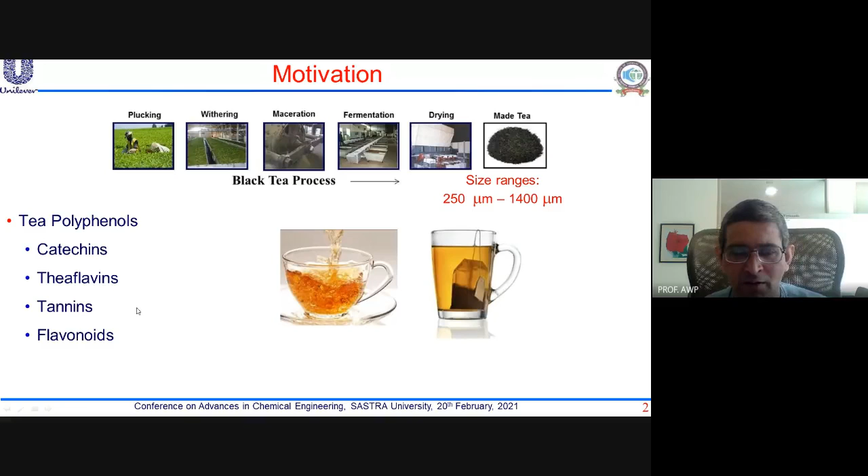These are just some of the components that we drink. These are not all the components - obviously there are many more. They are just written in terms of classes of compounds.

Remember, when you drink tea or coffee, you are drinking all these chemicals, and you're gulping down all these polyaromatic compounds. Just to give you a flavor of this...

If you take, let's say, 2 grams of tea and put it in water - somebody was mentioning refluxed - yes, if you put it in water and reflux it for 1 hour (normally we don't boil tea for 1 hour, but if you do this), 2 grams tea gives you a total soluble solids of 40%. That means out of this 2 grams, the insoluble part is 1.2 grams and the soluble part is 0.8 grams.

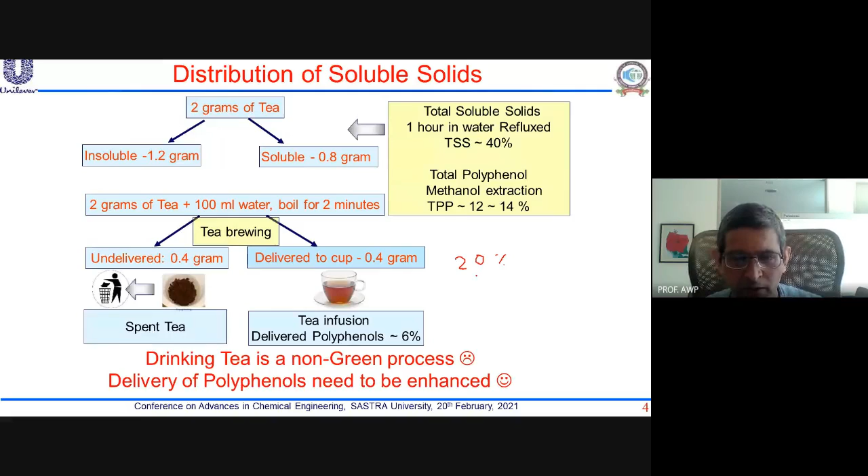If I approach this problem from an engineering point of view, think of it as a chemical reaction where I get a yield of 20%. How do I improve the yield of a chemical reaction from 20% to some higher number? Even if it is 25%, it's acceptable—that's a 5% increase, but a 25% increase over the existing yield. So that itself is a good target.

So the engineering concepts I need involve first thinking about the fundamental steps involved in this process. Unless I understand all the fundamental steps, I can't make a model and predict the infusion profile. And if we can't make a model and predict, we cannot improve.

So that is the engineering philosophy we try to learn in our career—that as engineers, we don't do trial and error. We try to investigate from a fundamental point of view, make a mathematical model, and try to predict.

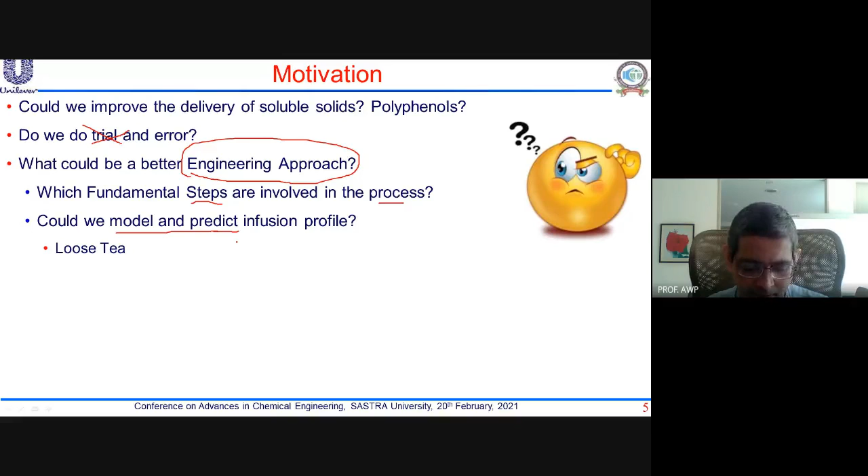Once we do this prediction, we need to look at two aspects. One is loose tea, which all of us drink, but the whole Western world does not use loose tea—they use tea bags. So a lot of the world's tea consumption is in the form of tea bags, whereas in our subcontinent—India, Sri Lanka, and similar places—it is loose tea that we drink or infuse.

So we need to not only understand these steps, we need to make a model and predict for both kinds—loose tea and tea bags. That's what I'm going to talk about today: how we go from these fundamental steps, how we make a model, and how we apply that model to both loose tea and tea bags. I'll go a little fast through some of these slides.

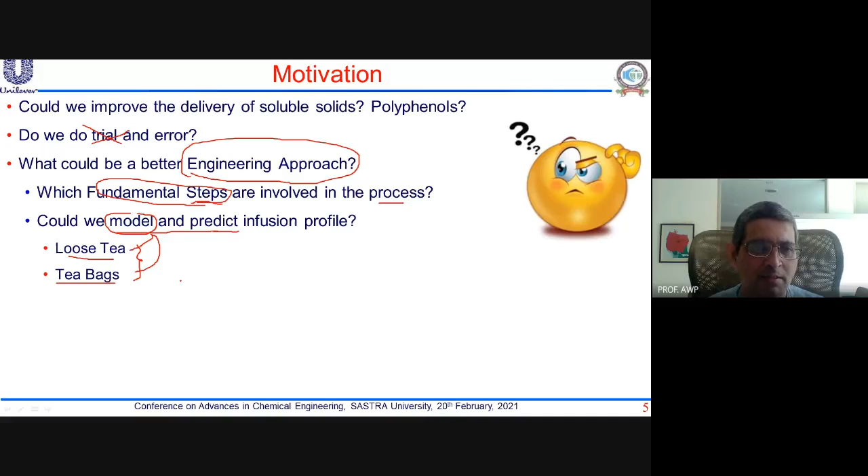So first, what are the fundamental steps? Now I have a tea bag or loose tea. Some of you have already mentioned in the chat box that there is a mass transfer process. Yes, there is mass transfer of components coming from the tea granule—it comes out. But before that can happen, water has to go in first.

So the first process is water going inside the tea leaf, causing swelling or infusion of water into the tea leaf. Once water is inside the tea leaf, the soluble components from that tea leaf dissolve in the water. Now that water, containing dissolved materials like polyphenols, catechins and so on, has a concentration gradient, and they come out—so there are two mass transfer processes.

One is the internal mass transfer through the leaf, and one is the external mass transfer from the leaf or particle or granule into your cup. If you think about a tea bag, there is an additional resistance because of that tea bag paper. Water has to diffuse through that paper. There is a diffusional resistance for water to go inside, as well as a diffusional resistance for the infusion to come out from inside the tea bag to outside in your cup. So when you take a tea bag, there are two more resistances arising out of the tea bag paper, and we'll talk about that as we go along.

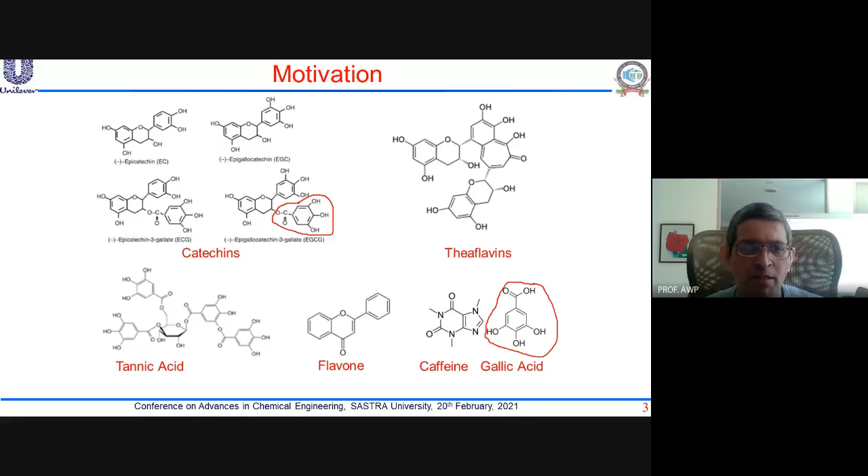Obviously, UV-visible is not a quantitative measurement. You need to have a standard and a calibration curve. We can make a calibration curve because the underlying component, if you see all these compounds, is this gallic acid. So we can have a calibration curve with gallic acid. Gallic acid you can get pure from Sigma Aldrich and other companies, and then make a calibration curve with gallic acid. When you put all these things in UV, you can say that my infusion has so many equivalents of gallic acid, because that is what we are using for our calibration curve.

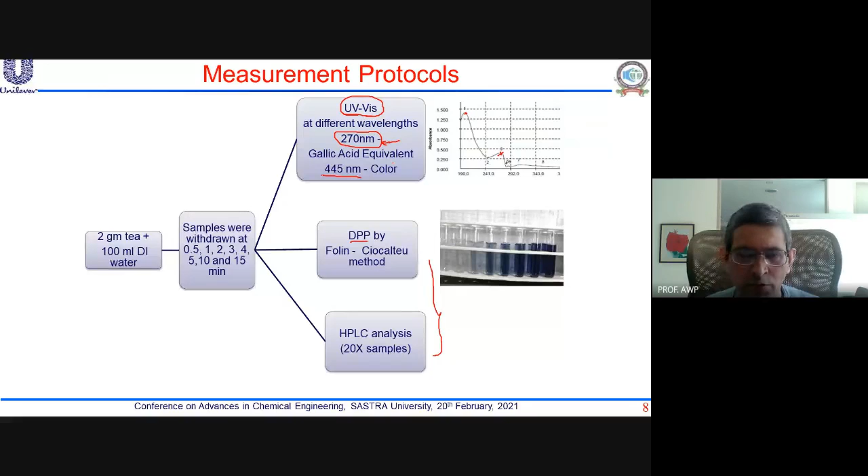So results, when we write, we are writing in terms of gallic acid equivalent that is present in the solution, in the cup. Okay, so just a little bit, two slides about modeling.

One is, you are very well aware that there are different scales of modeling. You could make a model at a reactor level, at a particle level, at a pore level, or at a molecular level. The scale of the model is reducing as you go from left to right. Obviously, the complexity of the model increases from left to right, but the depth of information that you get increases significantly as you go from left to right. And of course, the time and cost of model solution also goes up as you go from left to right.

So if you have had a process modeling course, these are some of the things that you deal with. Obviously, you would realize that if you are modeling at the scale of equipment or the reactor, then you end up with algebraic equations, which may or may not be time dependent. If you are trying to model at a particle level or a pore level, you end up with ordinary differential equations, either in space or in time, or both.

And if it is both, you end up into partial differential equations. So this is the sort of hierarchy of models, and we need to think about what level of model we want, so that we can have a good balance between the information we want and the cost of doing that model. Cost in terms of time, in terms of computational facilities required, and so on. Time and cost are one and the same.

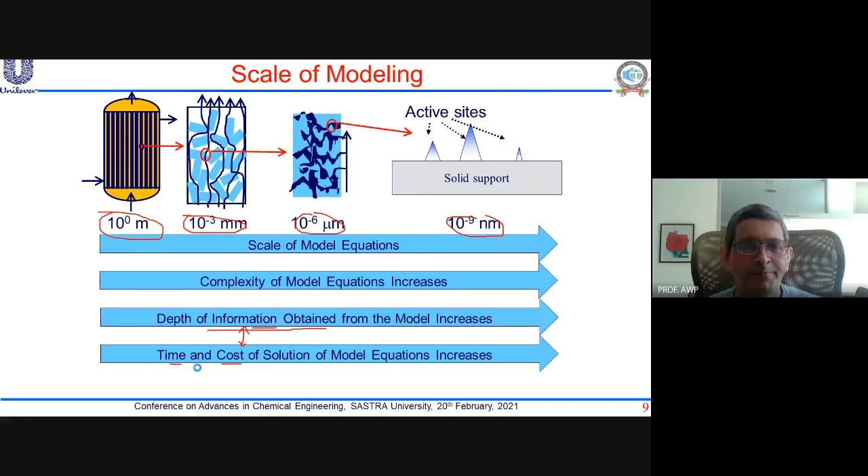So this is a judicious choice that we have to make when we need to make a model. I hope you have studied some of these concepts in your process simulation course.

So let's talk about infusion, infusion of loose particles. As I said, we need to understand all these steps, and the first step is looking at swelling, water going inside of the leaf. That's the first step we need to quantify. Once the swelling happens, then infusion profiles, and then comes our mathematical modeling.

So I will go a little faster now that you are aware of all the things you want to take into consideration in developing the model.

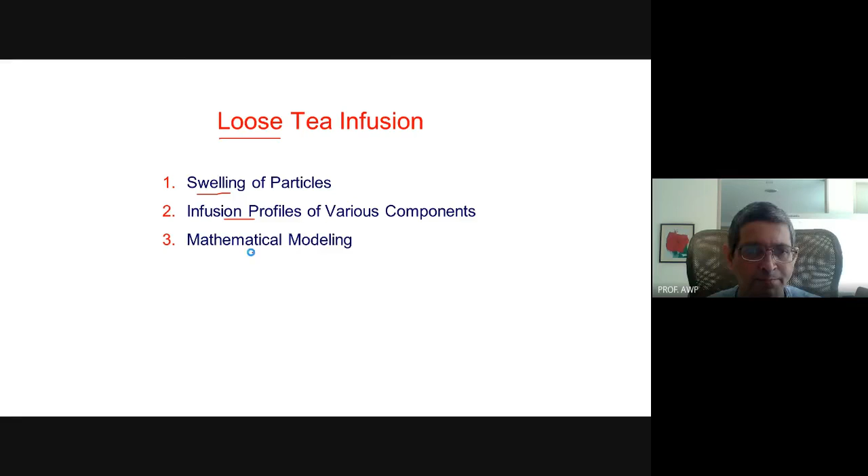First of all, we need to think about the size distribution. Whenever you buy tea, it is not going to be one particle size, you will get a size distribution. That's something you need to measure. If you have to do controlled experiments, you need to take a very narrow size particle distribution, so you sieve and take smaller fractions for your experiments. Otherwise, if you take the whole tea, you have a whole bunch of particle sizes, and you don't know what is happening to which particles. So that's what we do.

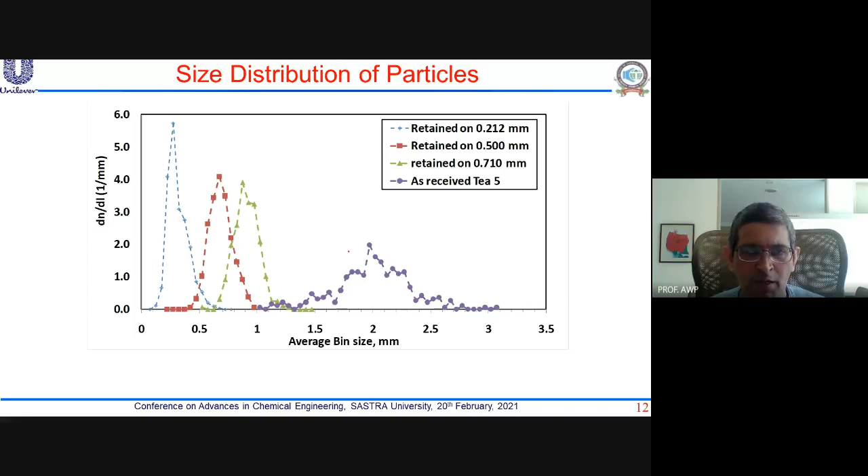And if you have to investigate swelling, there are a couple of ways. We investigated a single particle, and with the help of a camera, we tried to look at the increase in diameter or surface area with respect to time, how this particle becomes bigger because of swelling. Or you can take a bunch of particles and do an infusion, and find out the extent of swelling by seeing the height of the bed before you start infusion and the height after, then you can quantify the increase in volume and characterize the extent of swelling.

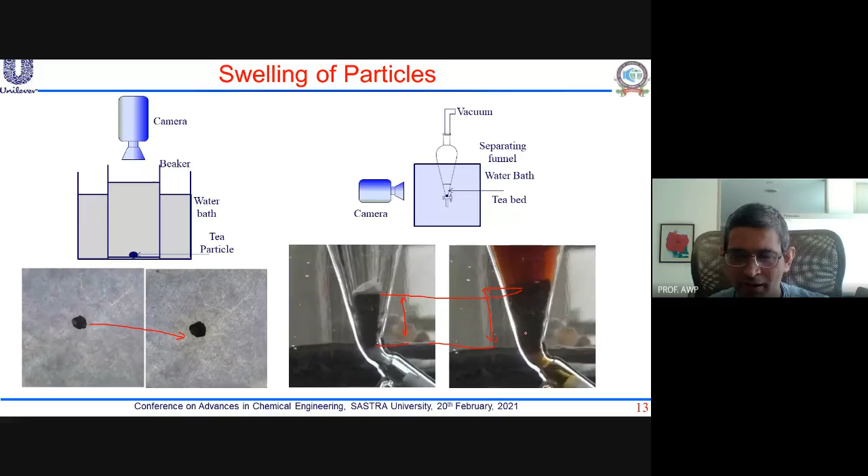You can take a different diameter and so on. Don't worry too much about the results. There are a couple of things which I would like you to conclude from these graphs.

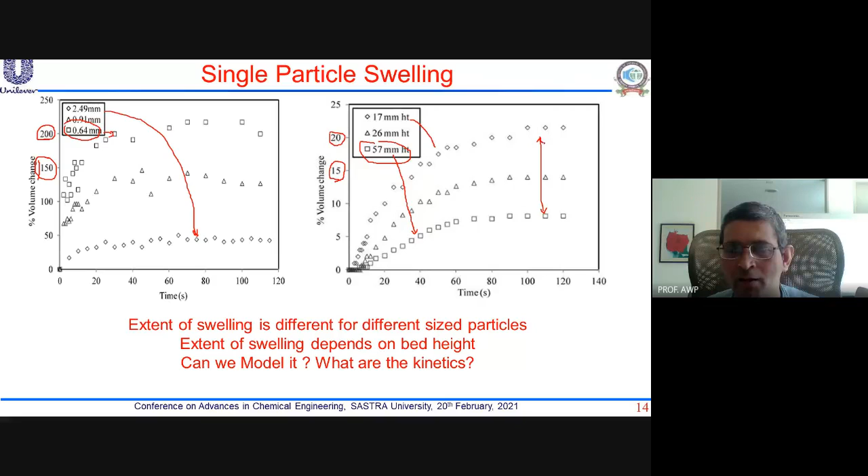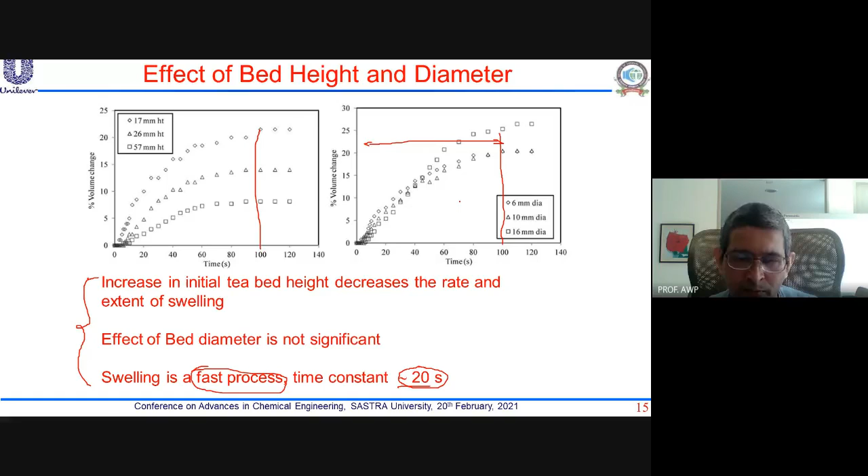Now we have seen so many things, that different particles swell to different extents. Now how do I understand all these processes, and how do I quantify this a little bit better? One of the ways that chemical engineers understand different parameters or effect of different parameters, very peculiar to engineers, is we try to make things dimensionless.

So we can define a dimensionless swelling parameter as the diameter of the particle at any time t minus the initial diameter, divided by the diameter at infinite time minus the initial diameter. So now this dimensionless swelling parameter is going to go from 0 to 1.

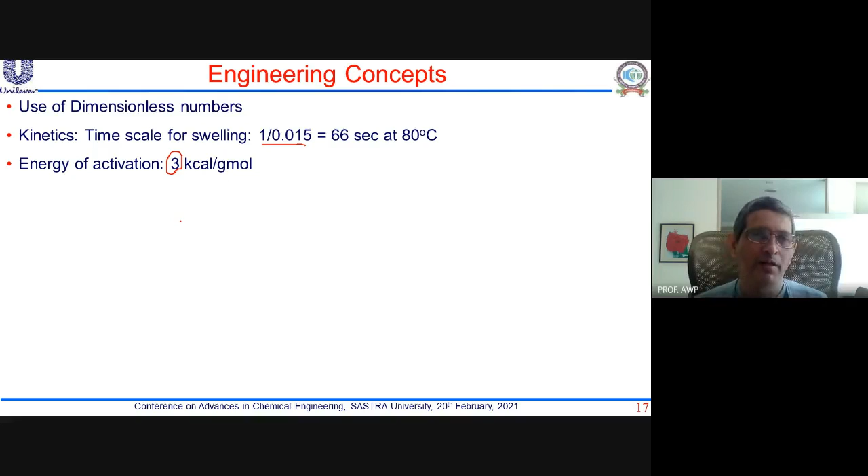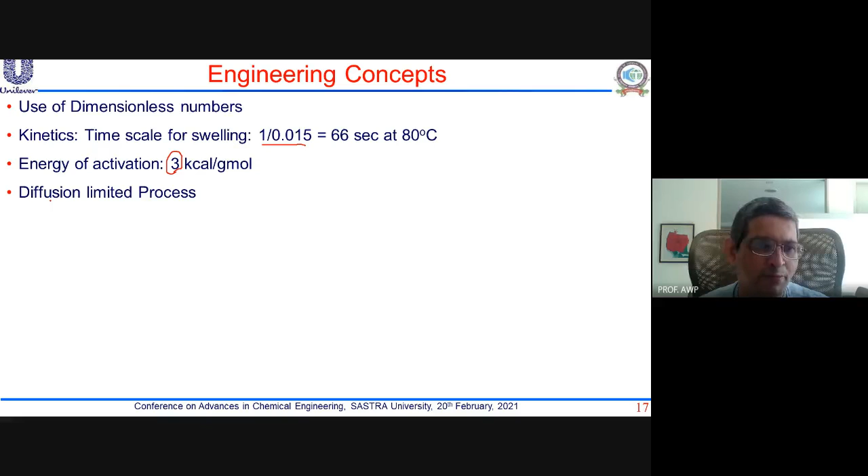This number should also tell you something, that this swelling process is controlled by diffusion. It's not like a chemical reaction, it is more of a diffusion of water through the leaf, and that's why the energy of activation is so very low. That means this water infusion is a diffusion-limited process.

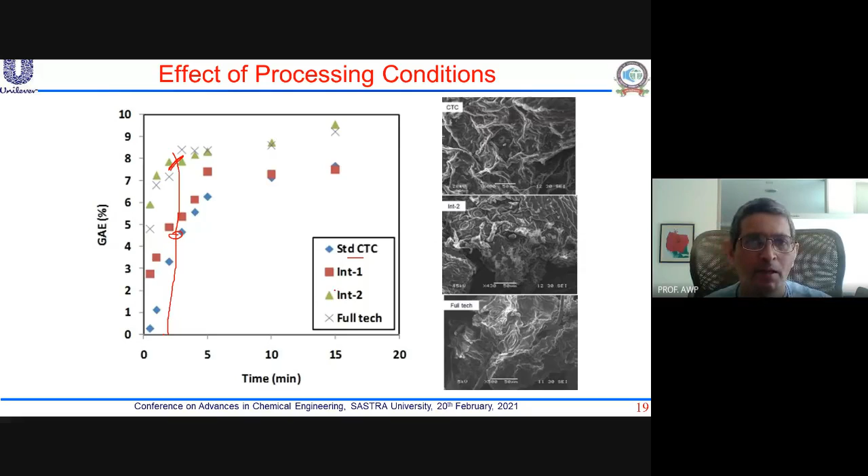So if you have to understand kinetics, this looks like a first order process, right? But you see, it's not quite like the first order process, there are two time scales here. There is one time scale that is like this dynamics, and there is another slower dynamics here.

If you have to fit a first order kinetics model, it doesn't fit really well. If you just plot log of concentration at infinite time divided by concentration at infinite time minus concentration at any time, versus t, you don't get a good fit here because of this slower time scale.

So what people did just in the 1980s is try to modify it by a constant, by an intercept. So what you're really measuring is the dynamics of this slower step, and the intercept is what you are really inferring by this constant A.

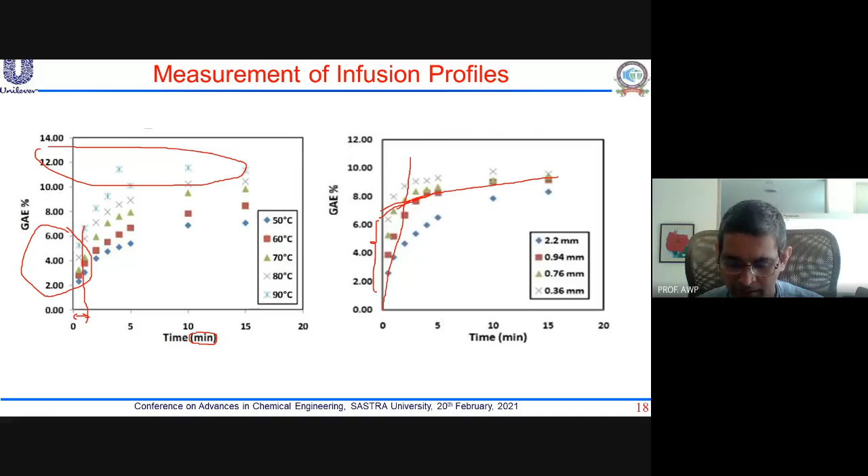So does this tell us the physics of the problem? No, it does not. Does it help to quantify it a little bit better? Yes, it does. And then I can use this K observed and look at the effect of temperature, and then I can find out the energy of activation.

So again, this is also a partly diffusion-limited process. We are able to understand a little bit more by going to this sort of semi-empirical kind of model. That's what people did in the 1980s.

Now, obviously, we need to go one level more because we are in the 2020s. So if you have to think in terms of two aspects, one is diffusion and one is the dissolution of the active components into this water. There are two processes, and we as chemical engineers are the most endowed people to handle diffusion and chemical reaction. We do it all the time, all our life, diffusion and reaction simultaneously or in series or multiple reactions and so on.

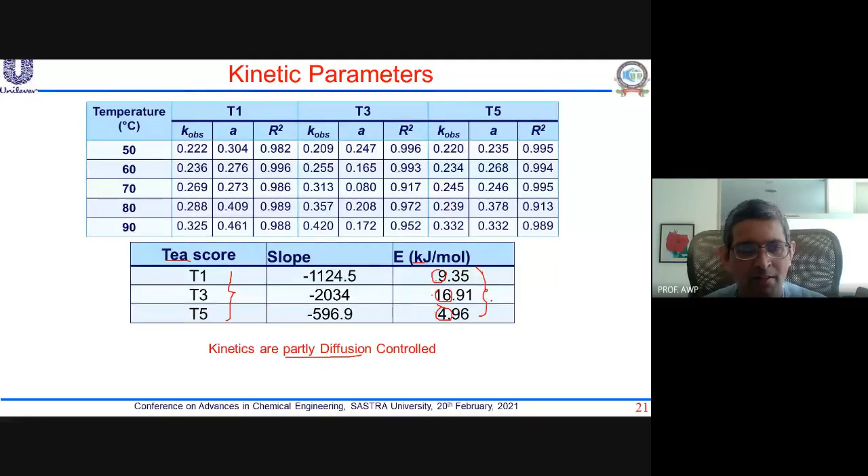Based on this, you can also work out the effective diffusivity of this process, and you can see that effective diffusivity is about 2.2 into 10 raised to minus 10. Oops, one cardinal sin I have made - I have not written the units. Let me write the units here: meter square per second.

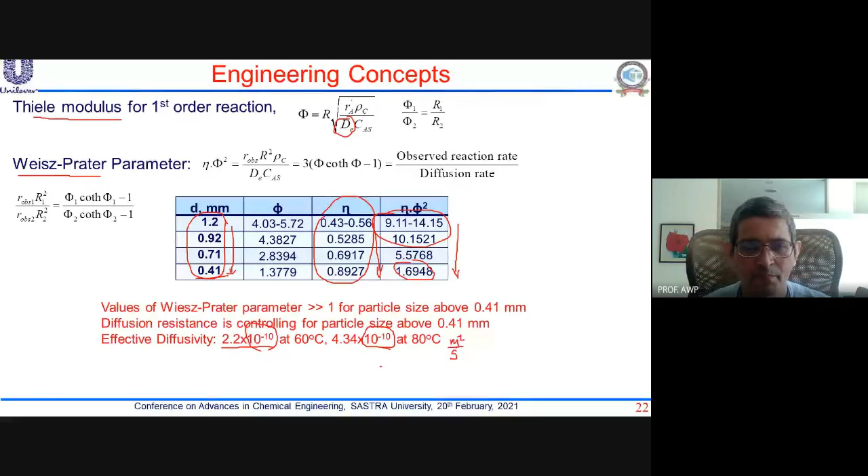So this is like diffusion through solids, membrane processes - these are the kind of diffusivities you get in catalytic processes, diffusion through the pores. Obviously here there are no pores, it is not a porous leaf, it is one leaf. The diffusion is occurring through that leaf matrix, but it's the same order of magnitude of diffusivity.

Here is one graph I would like to emphasize. Let us plot gallic acid equivalent in the teacup versus the volume change - fractional volume change, not percentage. If plotted in terms of percentage, this would just be 20%, 40%, 60%, 80%, and so on. This is the data, all the data from our experiments.

What does this tell us? Look at two extremes - this is one more thing we as engineers do to understand the process: we try to look at limiting cases. One limiting case could be swelling kinetics are far, far faster than infusion kinetics. If that had been the case, our graph would have looked like this red line - all the swelling would have been complete before any infusion starts.

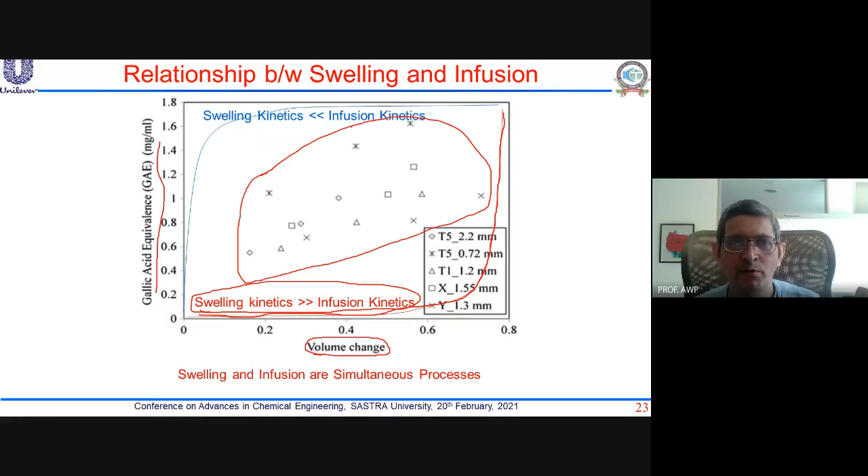If we had the other limiting case, swelling kinetics were so slow as compared to infusion kinetics, all the material would have essentially come out, and then the volume change would have occurred. That's the kind of engineering analysis you need to do - think about what are the limiting cases. Obviously there are two processes happening simultaneously, swelling is happening, infusion is happening. So what is the limiting case? Swelling very, very fast is one limiting case, infusion very, very fast is another limiting case.

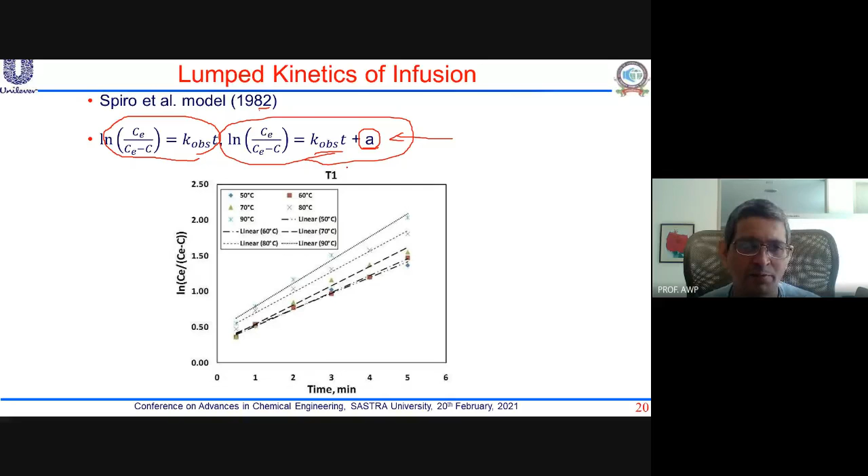You can see all the experimental data shown by these symbols fall in between. That means both swelling and infusion processes are occurring simultaneously - it's not that one is more important than the other. Now you can see how much more insight we have gotten into the process rather than just this empirical or semi-empirical kind of equation. This equation does not tell us anything about all these processes, whereas look at how much more information and understanding we have gotten about the process by doing these experiments, and not just doing experiments, but analyzing the data from an engineering point of view.

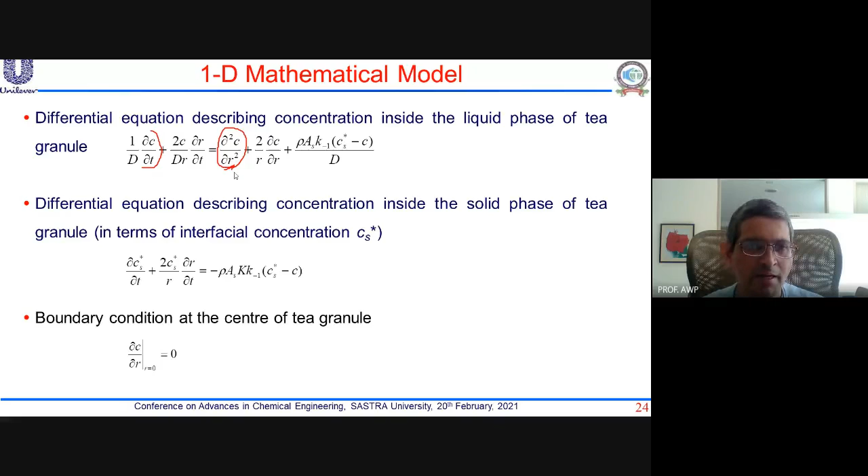So next step would be, because these are simultaneous processes, we need to treat them as simultaneous processes in order to develop the model. The easiest thing we can do is a 1D time dependent model - so you have a del C by del T term, and a del C by del R term. Let's treat the particle as a spherical particle to make life simple. Then we can write the boundary conditions, and the R component here, because the particle is swelling, that R will change with respect to time. And we have a mathematical expression for how this R changes with respect to time - that's our swelling kinetics, which is what we had measured here.

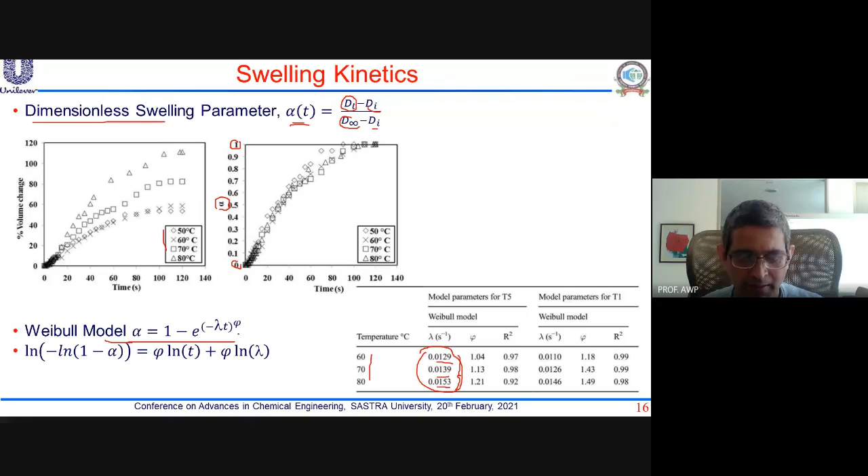Yeah, that's what we had measured here. So the kinetics that we had measured are helping us develop a better model. This is like a moving boundary problem. If you want to give big names to all these things, you can use all the buzzwords, but essentially the model is a 1D time dependent diffusion with a moving boundary for the outer surface of the granule.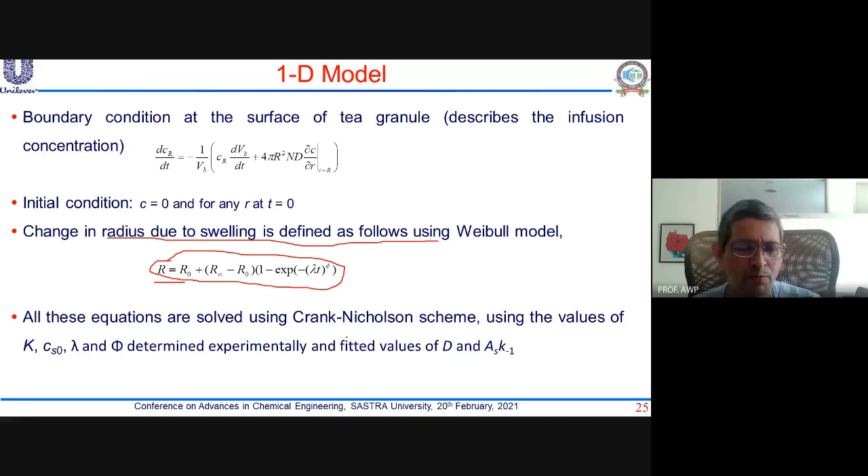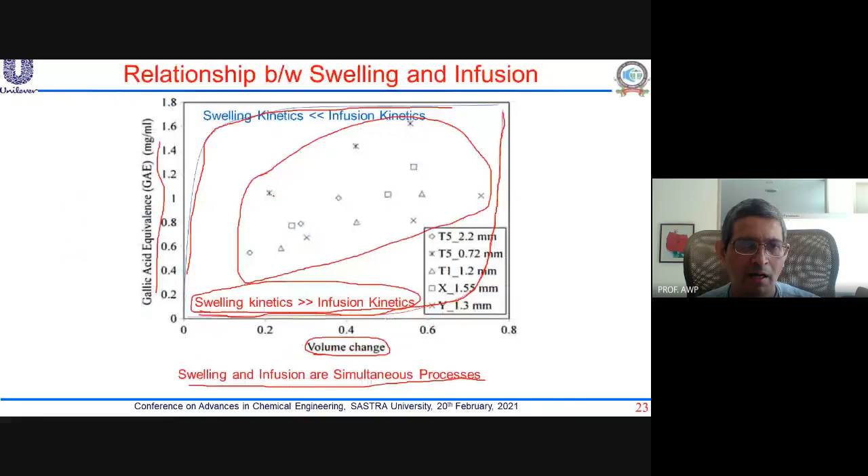And you can solve them using any of the numerical methods you know of. This is what we predicted. This is gallic acid equivalent versus time. These symbols show the experimental data. The dotted lines are for the Spiro model, that is the empirical model, and the solid line is our model considering 1D time dependent diffusion.

You can see that this solid line, our model, does a much better job of prediction than the dotted line. You may think they look very similar. No, look at this data. Look at the data here. Let's say at 100 seconds you are brewing a tea, see there is so much difference in the experimental data versus this model.

So this case is if your particle size is 0.4 mm, and this is if your particle size is 1.2 mm. In both cases we are able to predict things in a much better manner.

Now, any questions so far? Do you want to talk about anything? Otherwise, I will go on to tea bags, and cover tea bags a little faster. If you have questions, you can put them in the chat box.

One question that had come earlier was, should we consider dispersion? So that was one question. Yes, dispersion is there, dispersion is coming into the picture. Turbulent dispersion comes into play because you are agitating, and there's an external particle-to-infusion or particle-to-liquid mass transfer. That's where dispersion comes into picture.

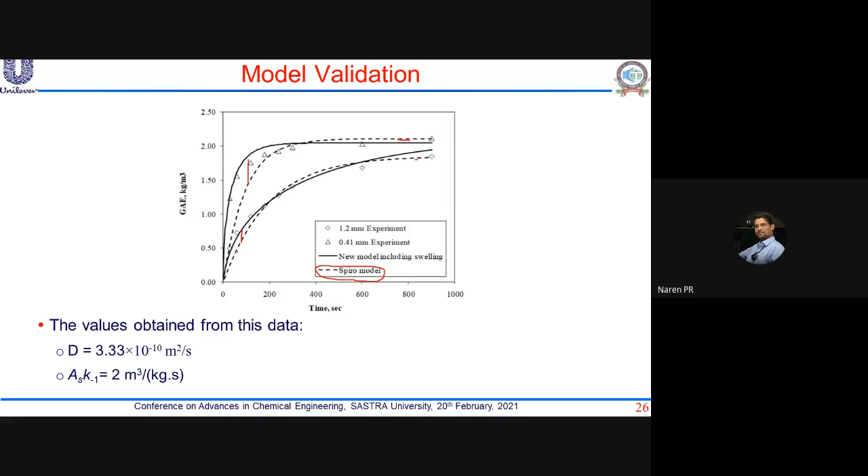Okay, so let's go forward. Now let's go to tea bags. Here there is something we need to think about. So as I told you, there is a bag resistance. The fabric that is there is going to offer some resistance.

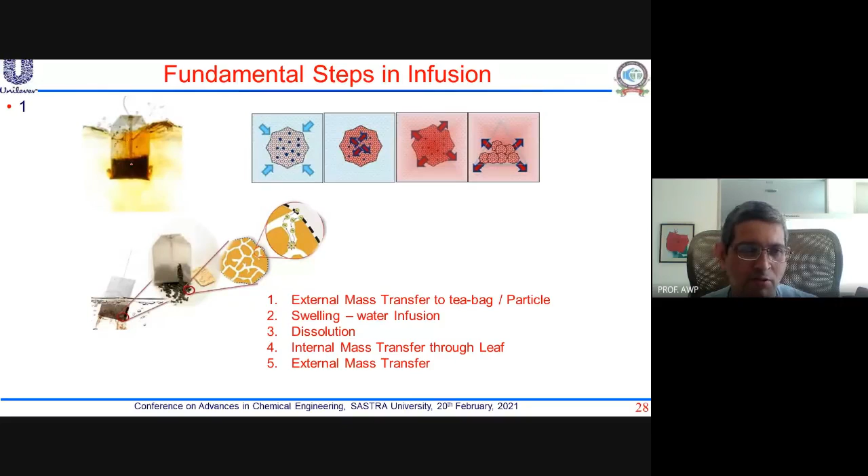So we need to account for that resistance, that was our first step. One is, of course, we looked at swelling, right? So a tea bag, after swelling, how it becomes bigger, you can see the volume has increased. In order to mimic that, we can use a sort of cylindrical jar, thinking of it as having a converging section, a straight portion, or a diverging section.

And then you see that the diverging section has the largest swelling because it essentially reduces the hindrance. So the next important point would be, if this is the difference in swelling between a hindered swelling process in a contracting portion, like a venturi, versus an expanding portion.

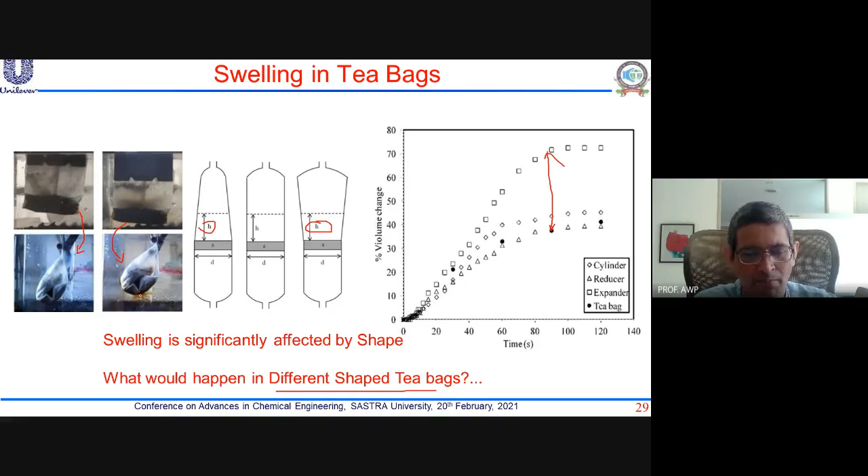What would happen to different shapes of tea bags? Tea bags come in different shapes, and the tea bag shape data is here. You have a double chambered tea bag, or a single chambered tea bag, or a circular tea bag, or a tetrahedral tea bag, or loose tea.

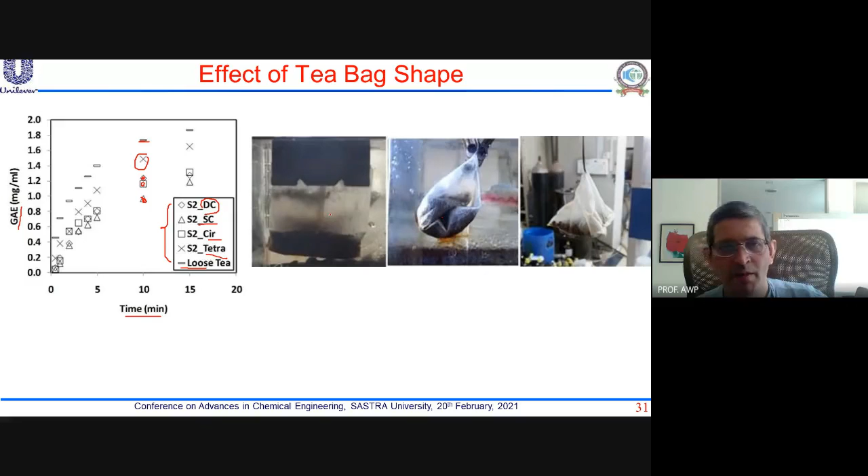If you were to rely on humans, they would dip a tea bag at different frequencies, because they are moody people. If you are in a good mood, you will dip your tea bag very gently. If you are in an angry mood, you will dip it a lot faster. So humans don't do experiments properly.

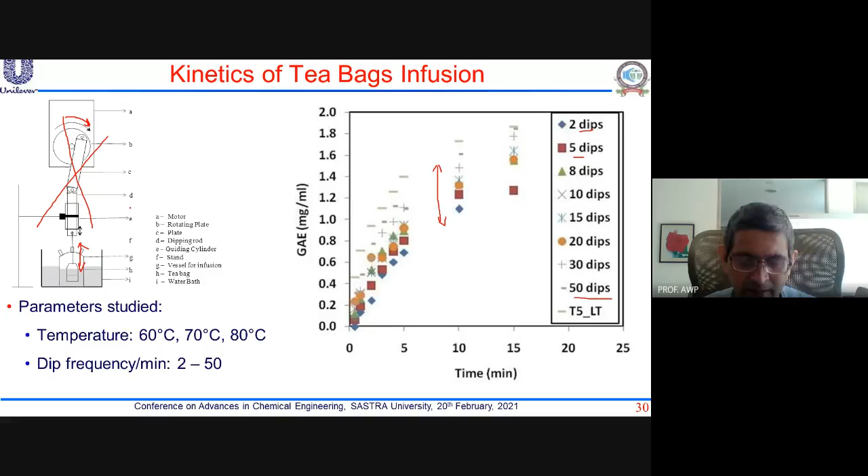The point is, can we convert this into a model, into a predictive tool, so I can predict what will happen for any number of dips? I don't have to keep doing experiments anymore. So you do limited experiments, try to generate a model, and then eliminate the need for more experiments.

So first we had to look at the tea bag paper. You have different kinds of tea bag papers. Earlier, all these papers used to be cellulose. In the meantime, people coated cellulose with polypropylene to get a more hydrophobic character. For sustainability reasons, people have gone to papers made out of polylactic acid, because lactic acid can have a green route, making polylactic acid a more renewable polymer than a hydrocarbon based polymer like polypropylene. You can also have woven tea bags made of PET, polyethylene terephthalate, which is polyester.

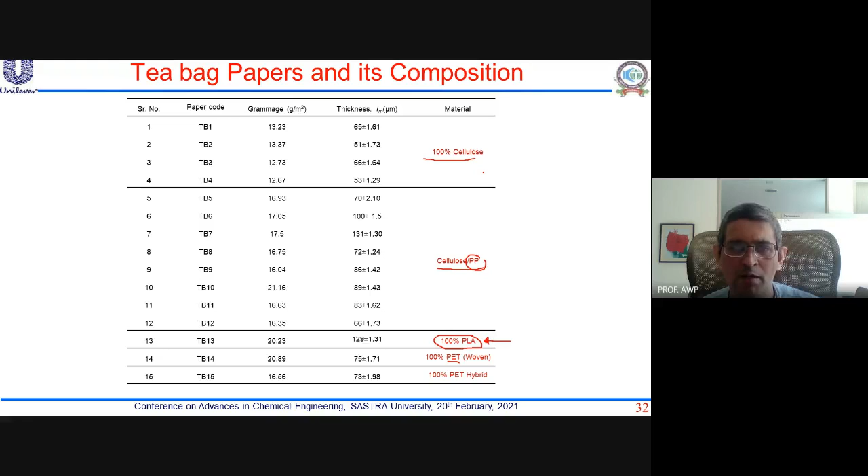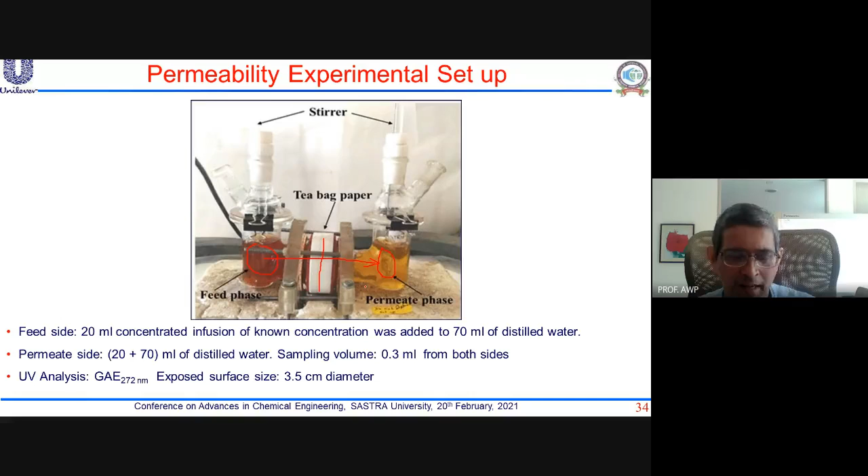And how that translates in terms of infusion, we did a membrane permeability kind of experiment. These are some standard experiments that membrane people do: you put your tea bag paper in between, you have one chamber with a concentrated infusion, another chamber with a diluted infusion, and you can quantify how the infused components migrate from the feed phase into the permeate phase. You can work out a simple flux-based model, so there's a feed side resistance, a tea bag paper resistance, and a permeate side mass transfer resistance.

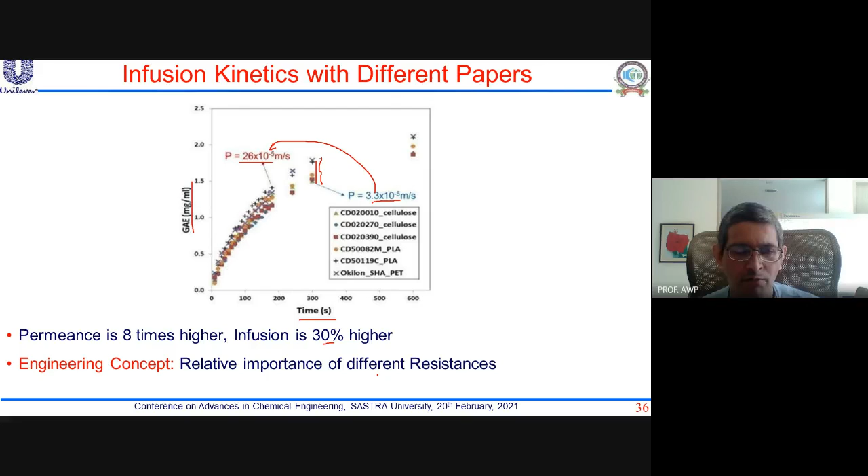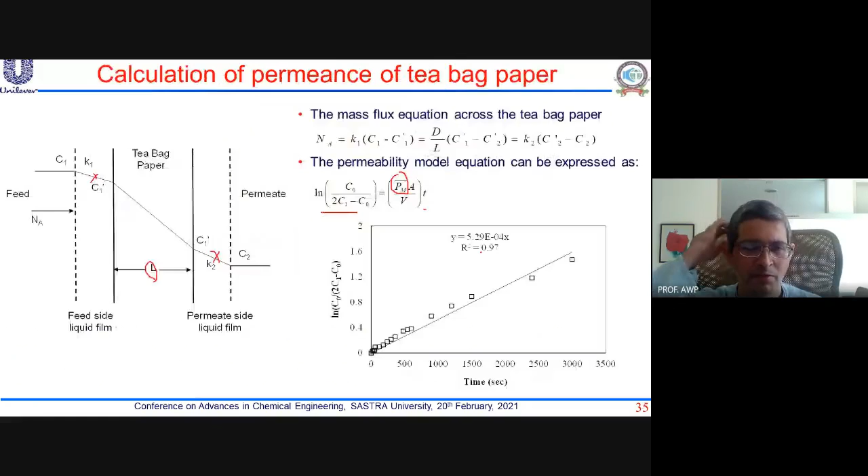It's about 30% higher. That means, what is our important engineering concept? Relative importance of different resistances. So the tea bag paper is offering significantly lower resistance to the infusion process, whether the tea bag paper looks like this, cellulose, or whether it looks like this, right? The resistance offered by that paper is not very significant.

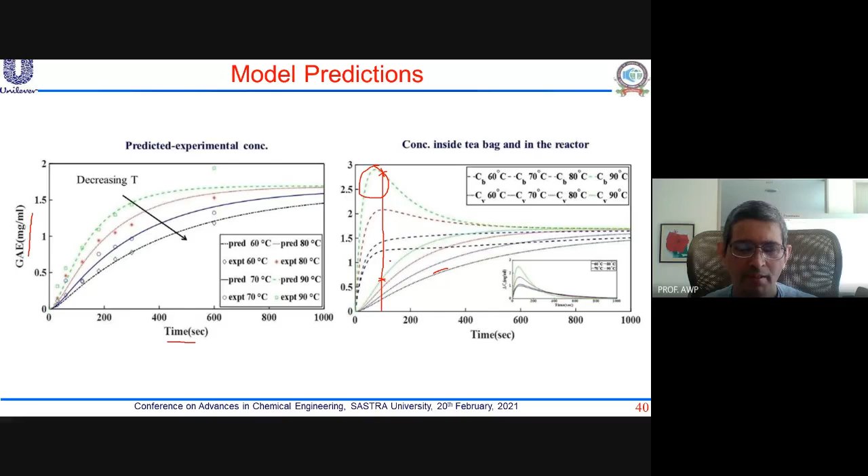A lot of the infused tea is still trapped inside the tea bag.

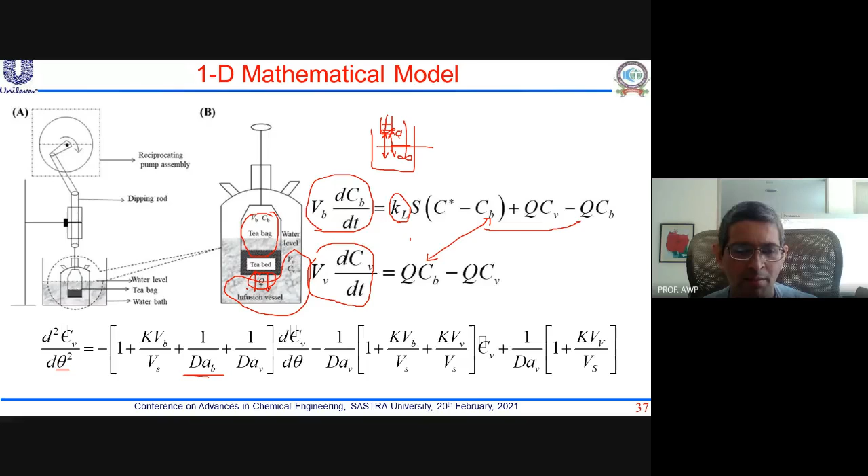Here the flow exchange between the two vessels is a fitted parameter - one fitted parameter is the amount of water coming in and going out of that tea bag. But if you really want to understand and quantify how much of that flow is going through, you can do a full scale CFD simulation to understand the hydrodynamics even further.

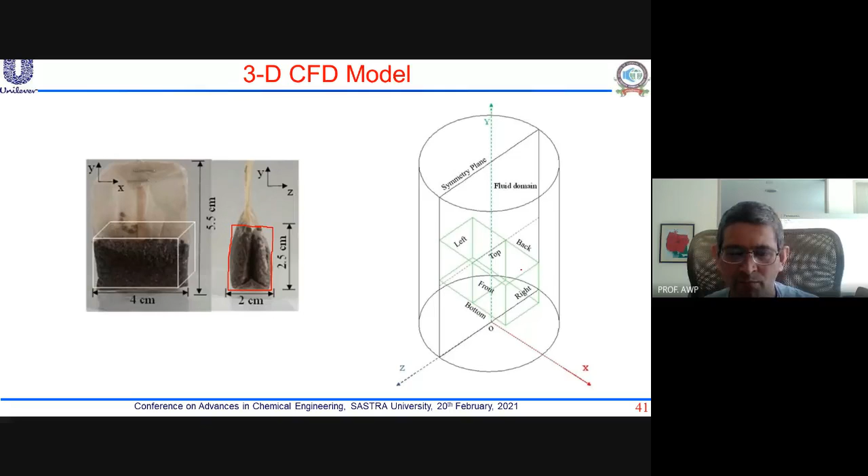So if this is your tea bag, you can visualize this tea bed or tea bag like a cuboid, and you can have this up and down motion of the cuboid in the vessel, or think about the vessel going up and down with the tea bag stationary, just as a reference frame. Now let me tell you the result.

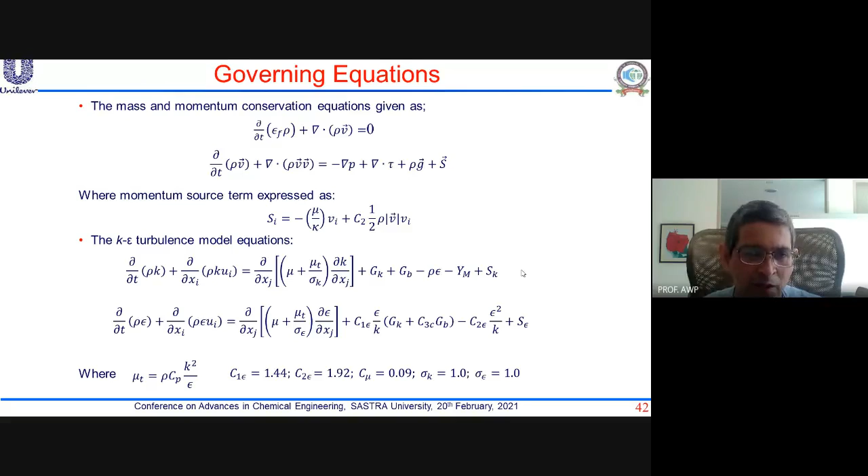You can solve the momentum conservation equation with a turbulence model and predict the velocity profile. I'm just showing you some velocity vectors. When the bag is going upwards, all these velocity vectors are pointing downward, but you also see circulations happening.

Some fluid is coming out of this tea bag here - you see some of these arrows coming out, some going in. You can work out how much fluid comes out, so you see a circulation here.

You see a circulation here, circulating like this. So some material is going in, coming out, going in, coming out. There is a small circulation here as well, going in from here and coming out from here. And there is a circulation here, going in from here, coming out from here.

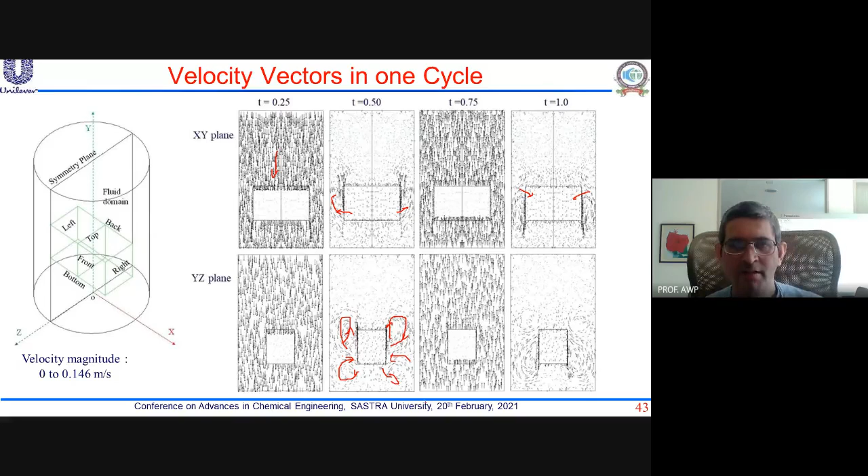So these are the kind of things that happen, and you can quantify how much of the flow comes in and goes out. You can visualize this in terms of velocity vectors, and look at different conditions.

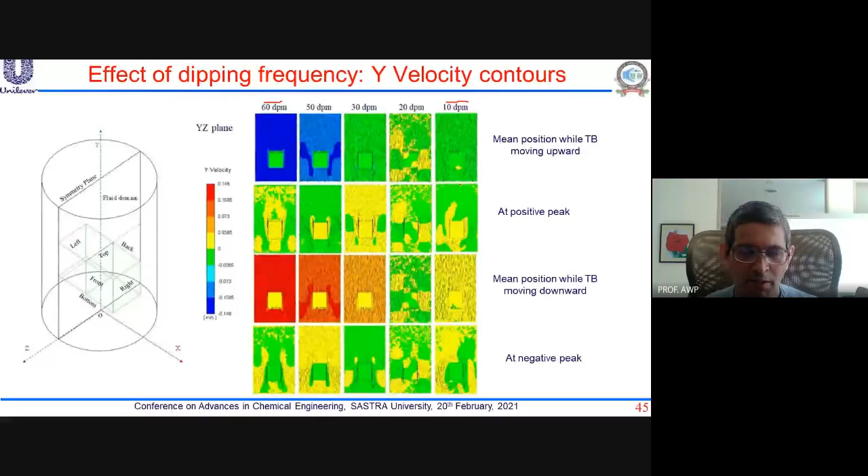Say, for example, this is for dipping frequency. What happens when you change the dipping frequency from 60 dips per minute to 10 dips per minute. You can look at how the pressure profile changes, because the pressure profile is what is driving the flow. You can draw a correspondence between the pressure profile and the velocity vectors, because finally the flow is driven by pressure, since we are just moving the bag up and down.

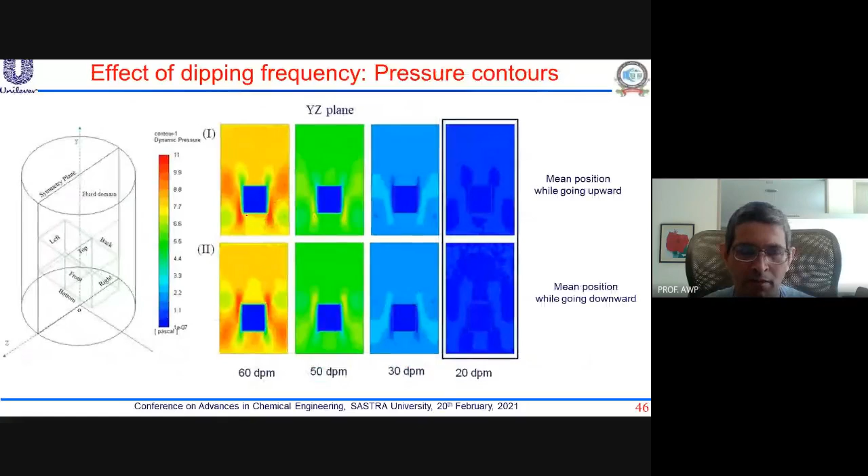You don't have to treat that flow as a fitted parameter anymore, because you can evaluate the hydrodynamics and predict the flows coming in and going out of the tea bag. So this is what I wanted to cover.

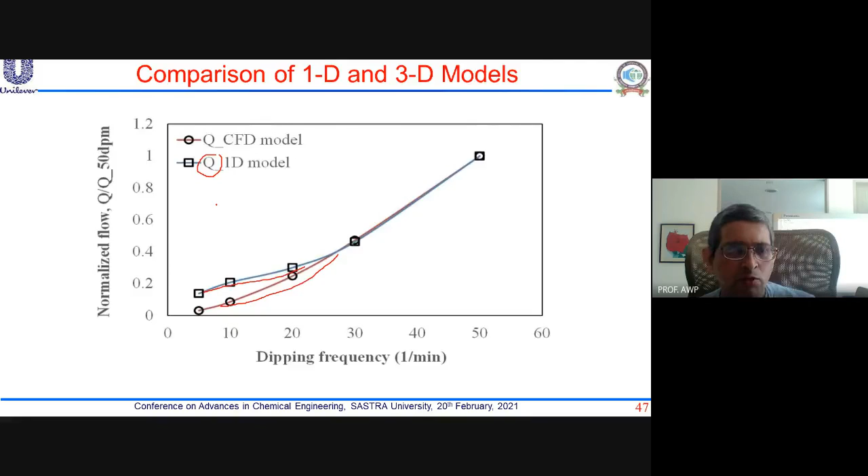Just to summarize the kind of engineering concepts we have used: one is using dimensionless numbers for generalization that leads to a predictive ability. The second engineering concept we use all the time is comparison of time scales for different processes. The processes here are mixing, dissolution, diffusion, mass transfer, and swelling. You can define ratios of these different time constants.

So you can define the Thiele modulus as a ratio of dissolution and diffusion process. Mass transfer Biot number relates external mass transfer and diffusion process. You can compare these different dimensionless numbers, and they tell us the relative importance of these processes. Energy of activation tells us it is essentially a diffusion-controlled phenomenon, at least for loose tea. When it comes to tea bags, it is diffusion as well as external mass transfer that comes into picture, because the flow through the bed of particles is what decides the mass transfer coefficient.

You can develop models step by step. The first step would be fitting equations, either the Spiro model or the Weibull equation for swelling. You can do a 1D model for loose tea, a 1D model for tea bag, and finally, progressively, we can now predict the whole 3D hydrodynamics around the tea bag.

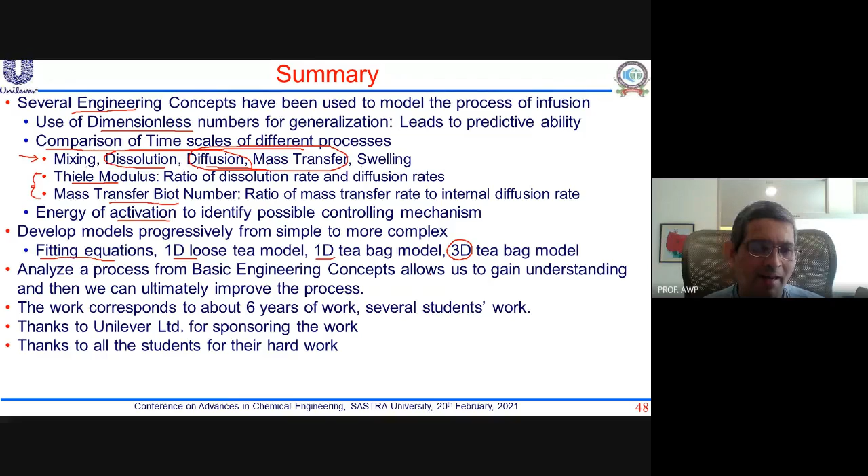So the point I'm trying to convey is that in any process we come across, it can be as simple as an everyday process like brewing tea, but you can analyze that process using basic engineering concepts learned across all four years of undergraduate courses, gain an understanding, and ultimately model and improve the process.

So no matter what you're doing, whether it's a distillation column, an azeotropic distillation column, a membrane process, or a simple everyday process like tea brewing that you are simulating, get into the habit of analyzing a process from a basic engineering point of view and making a model.

So this work corresponds to about 6 years of work. It's 2 research projects sponsored by Unilever, and all these students are the ones who actually did it.

By the way, if you understand all these fundamental processes, it gives you a tremendous amount of enjoyment and thrill that you are actually able to predict something. A byproduct of that enjoyment, or of the process, is that your papers and theses will happen automatically. You don't have to do anything for publishing papers. It is the process of applying engineering concepts to any new situation that we need to enjoy, and everything else will just fall into place.

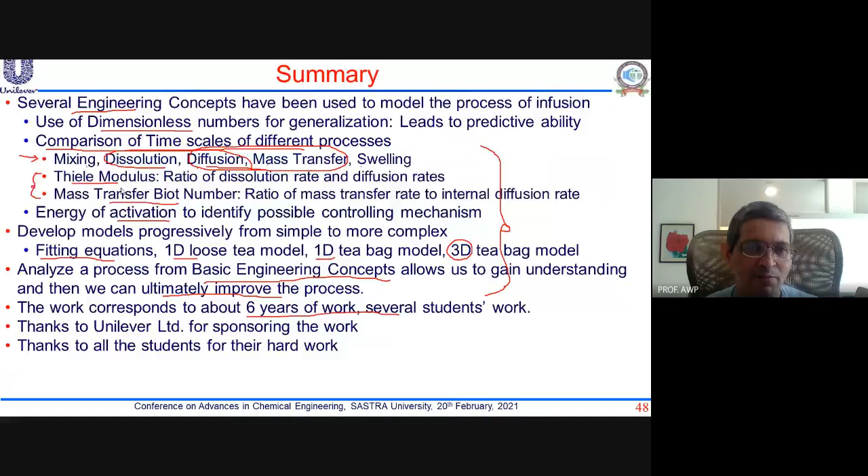These are the people who actually did all the work. Bhushan did all the work on swelling. Geeta did all the work related to characterization; she used to do HPLC and try to identify which components are coming out.

Rao Sahib was the one who developed the 1D model of diffusion with a changing boundary condition. Pallavi did the 1D tea bag model as well as the 3D CFD simulation. Durgesh was helping with the tea bag characterization, the SEM analysis, and some more characterization related things that he did, which I'm not showing because they are not that relevant for the modeling aspect. So this is what I wanted to cover, and if you have questions, I would be happy to answer.